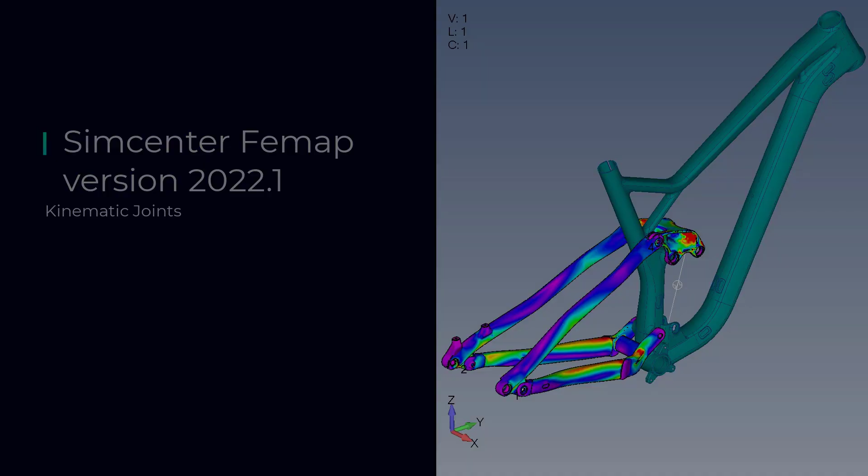New in Simcenter Femap 2022.1 is the support for Solution 402 kinematic joints. Kinematic joints allow structural analyses of an assembly containing moving parts. These kinematic joints will be stored under the Simulation Entities branch in the model info tree. Users can create various joint types such as revolute, inline, slider, spherical, cylindrical, slider universal, fixed, screw, universal, and constant velocity.

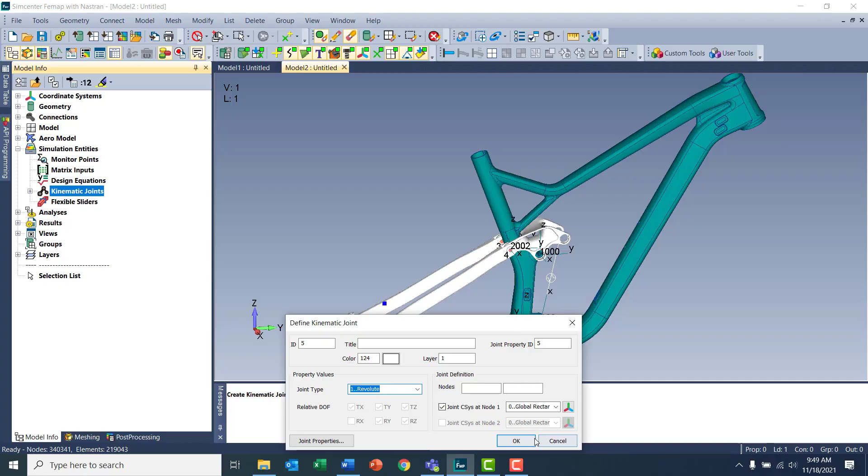In this model, I have 4 revolute joints connecting the suspension linkage on the rear of this mountain bike. So 1, 2, 3, and 4 revolute joints, and this allows me to connect the different pieces of the assembly, but also allow them to rotate.

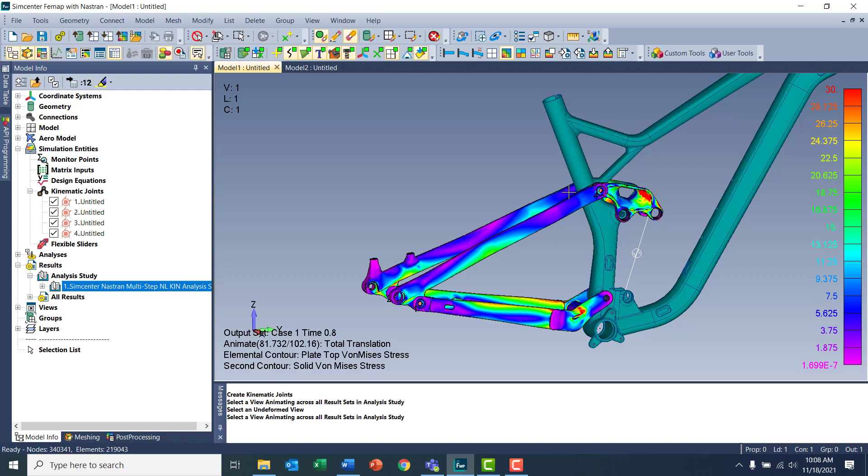I've already solved this model, and what I'm going to do now is animate the deformation of the rear suspension travel. You can see as the frame articulates that the revolute joints connect the parts in the assembly, but again allow them to rotate about the pieces at the point of the revolute joint.

There has also been the addition of kinematic connections, and what these kinematic connections do is basically speed up the process to create kinematic joints.

Let's say I want to create a revolute joint on this side of my universal joint geometry here. I'm just going to do it to ground because it's attached to nothing on this open end, and I'm going to connect the motion attachment as a surface here, and it will automatically generate me a coordinate system in the axis that I need it to, along with the point of the joint location as well.

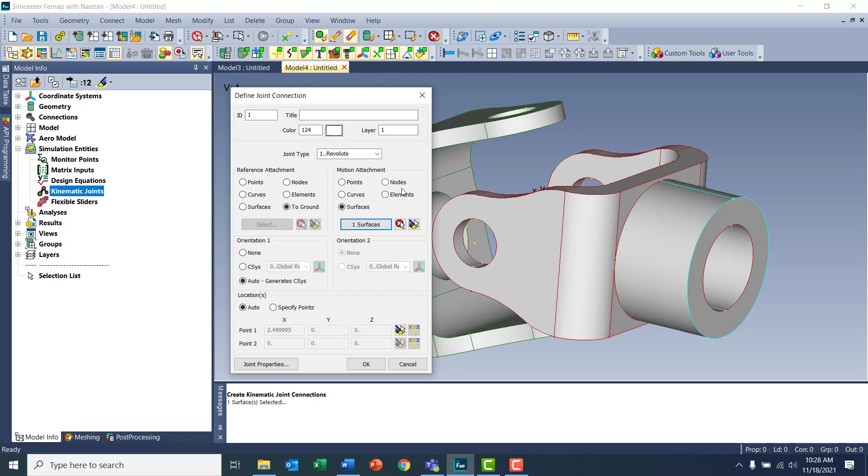Under joint properties, I can specify some of the more technical things like translational stiffness and rotational stiffness and others depending on what type of joint it is. In general, I can set some of the expansion methods.

As I selected a surface, I can choose the specifics, so whether it expands out to the nodes on the boundary only, just the interior, or both. I will leave it at boundary only.

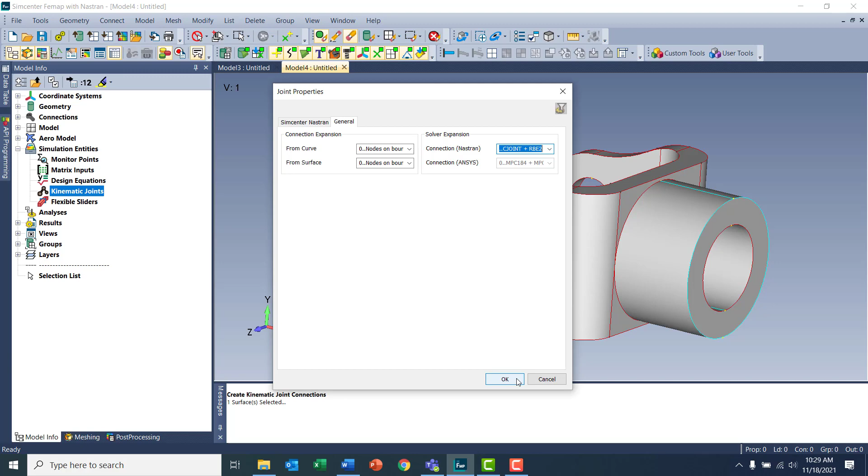For Nastran, we can also specify what type of element connects the joint to the mesh. In this case, I will do the CJOINT and RBE2s to connect to my mesh there once I've meshed it. As you can see, once I've created this, it creates my coordinate system and my joint as well.

I'm going to repeat my process and create another connection, this time being a universal joint. I'm going to go ahead and use my surfaces to select the holes of each clevis. This time I already have my coordinate systems created.

In this case, I want the number 100 here with the x-axis aligned. And I'll repeat with the other side.

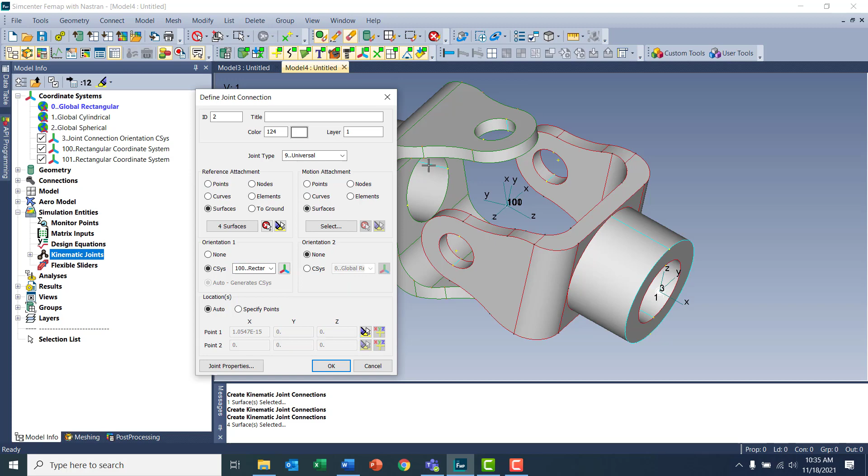And create that one. To drive the motion of the simulation, I'm going to put a driver load on that revolute joint.

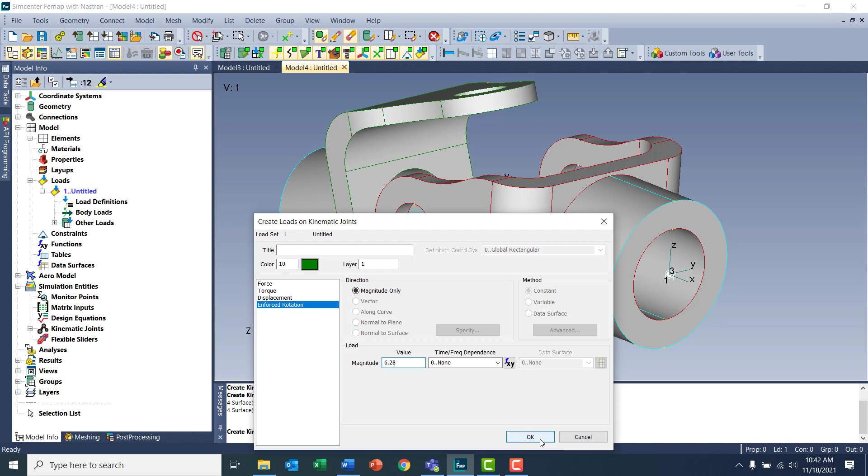So I'll make it 360 degrees, radians, and go ahead and select my revolute joint. Now all I have to do is create one more kinematic connection at this side, mesh my part, and I'll be ready to solve.

And just to finish up here, I will animate the deformation of one revolution of this universal joint.